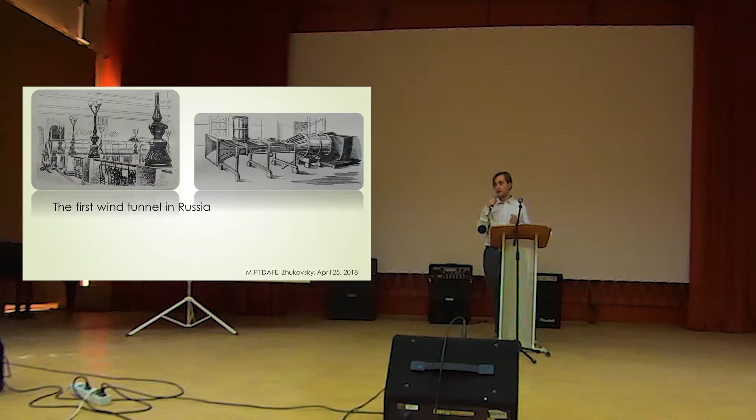With the help of his students, he managed to build the first wind tunnel in Russia. Due to lack of space, the 7 meters long tunnel was placed right in the lobby of the university. With help of volunteers and his students, he explored how man-made objects like kites or stuffed birds behave in the tunnel, and this became a basis for the theory of spinning.

Zhukovsky was also the first scientist to mathematically explain the origins of lifting power. According to Zhukovsky, the lifting power equals the density of liquid multiplied by the speed of the flow on incidence and velocity circulation and length of the current segment of the wing.

In addition to his scientific works, you can see on the screen his famous transform. He transforms the complex space circle into an airfoil, and here's the formula that does this. So this is all about his scientific works.

Now I'd like to pass the word to my colleague Natalia to tell you about his memories and influence. Thank you, Georgi. And now let's turn to the third part of our presentation.

To begin with, in 1904, on the basis of his laboratory, the first Institute of Aerodynamic Research was created. It was there that Zhukovsky made his main discovery. He found the force of the lift of the wing and gave a formula for calculating this force. Thus, the calculation of any aircraft became possible.

Importantly, even before the war, Zhukovsky organized aviation courses. There he began, first in the world, to read the course of lectures on theoretical foundations of aeronautics. In 1918, the courses were transformed into the Moscow Institute of Air Fleet Engineers, and later it was renamed the Zhukovsky Air Fleet Academy.

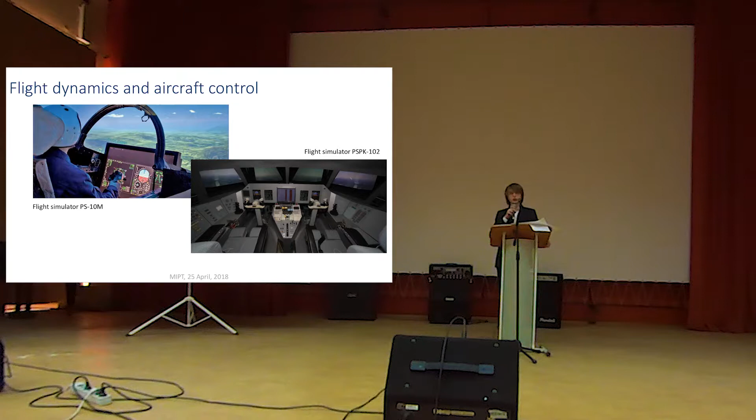So let's start with flight dynamics and aircraft control. Aircraft control have always been an area of high priority for TSAGI. The institute has introduced lots of flight simulators and control systems simulators for solving complex tasks involving dynamics of maneuverable and passenger aircraft. TSAGI specialists use simulators for experiments with takeoff and landing modes of passenger and experimental aircraft, and also to study dynamics and controllability of unmanned aerial vehicles.

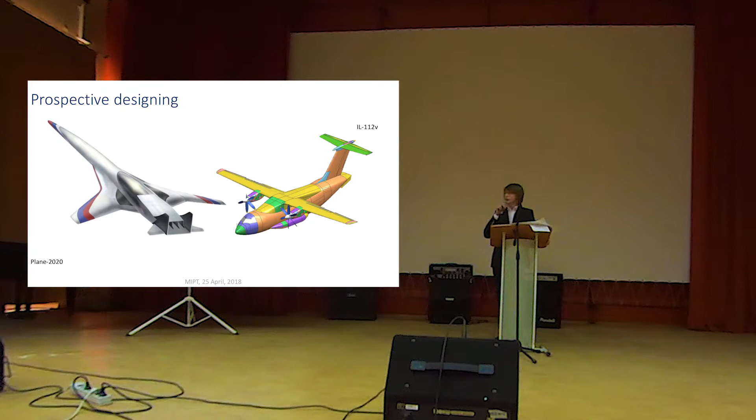Prospective designing research into the prospects of aerospace development rests on an efficient design technology which draws upon the Institute's increasing scientific and technological solutions. The results of the optimization are used in substantiating the feasibility of new concepts and preparing wind tunnel and test bench experiments.

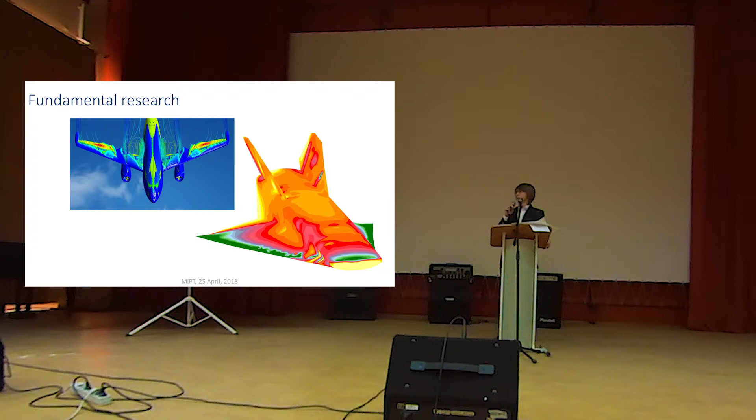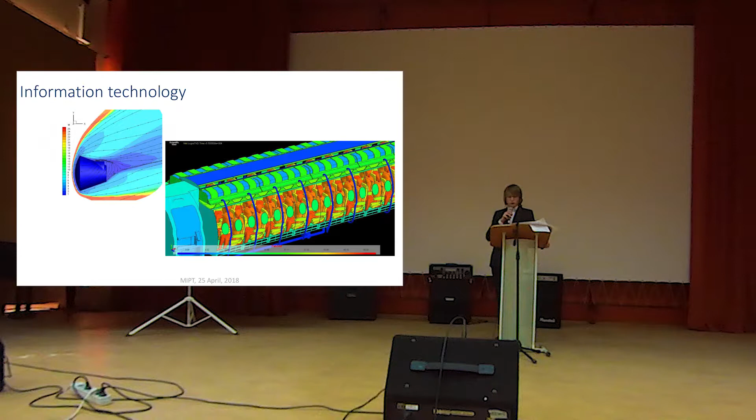One of the most important areas of the information technology supplies at TSAGI is the procurement of fundamental and applied computational and experimental research in aerodynamics, aeroelasticity, strength, and flight control systems for aircraft of various types. Well-known computational systems are widely used in studies.

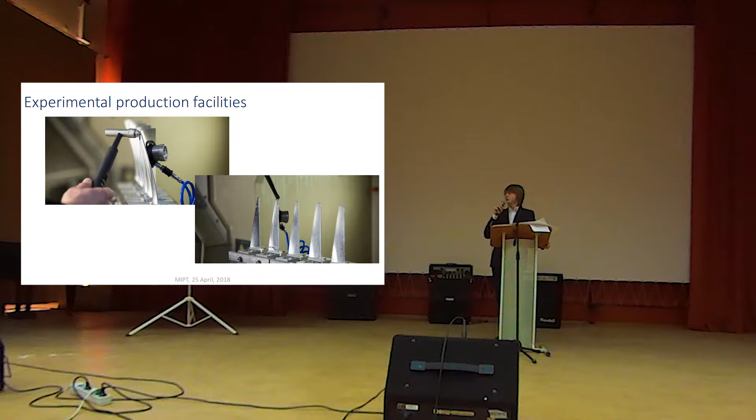It's necessary to mention that developing and manufacturing aerodynamic scale models is an important line of the Institute's activity. Models range from several centimeters to large-scale models that have 10 meters in dimensions and more. A number of innovative facilities conforming to world standards has been created at TSAGI to satisfy the increasing demands of modern experiments, and you can see some of them on the slide. That's all for my part, and I'll pass the word to my colleague Yaroslav.

Thank you, Natalia. It was really interesting. Now I'm going to tell you about projects that have been developed by TSAGI. It's a well-known fact that TSAGI is involved in many spheres of aircraft construction, such as aerodynamics, strength tests, and aeroacoustics, and many others. Aerodynamics is one of the most important spheres that TSAGI started developing. Each aircraft constructed in Russia is tested in wind tunnels at TSAGI.

Along with aircraft research, TSAGI tests other things. For example, they research airflows made by trains. On this slide you can see wind tunnel T-101, one of the first wind tunnels made at TSAGI, and also supersonic wind tunnel T-117.

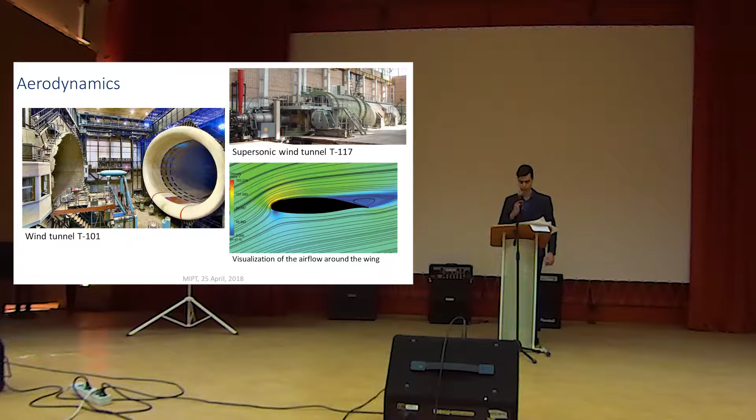Moreover, TSAGI is engaged in other important things, such as strength tests. Without investigating different materials' durability and fastening, it's unreal to build and create an airplane. So TSAGI engineers carry out research in aeroelasticity both in laboratories and in practice. For the last few years, a lot of well-known projects have been made at TSAGI, such as experimental testing of strength and aeroelasticity of the most modern aircraft built in Russia, such as the Su-35, Su-57, and Sukhoi Superjet 100.

It's necessary to mention that using new and powerful engines has turned aircraft noise into one of the most negative factors influencing the environment. That's why specialists from TSAGI are working on noise reduction. Lately, TSAGI has carried out many researches connected with engine noise reduction. For example, specialists of TSAGI took part in different projects connected with civil aviation, such as the Tu-134, Tu-154, and Il-86, and many others.

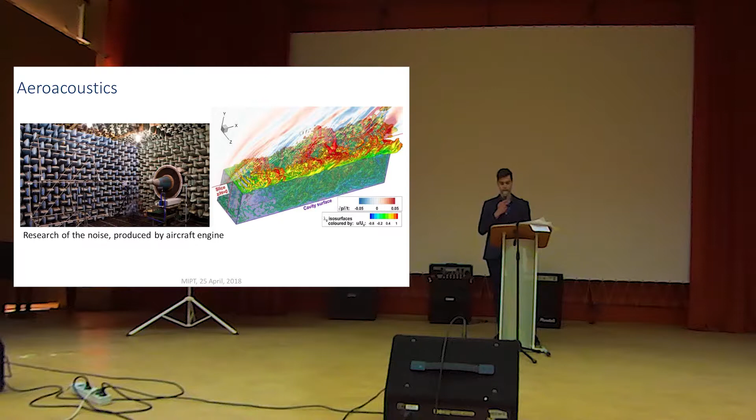Moreover, a big job was done by the aerodynamics and aeroacoustic departments. Mass production of MS-21 will start in 2019, and we hope it will be able to compete with airplanes like the Boeing 737 MAX or Airbus 320neo. Besides, TSAGI is working on many other projects now. For example, the new Russian fifth generation fighter Su-57 is being tested by many TSAGI departments.

Next slide, please. Also, today TSAGI successfully cooperates with more than 50 foreign companies, such as Boeing, Airbus, Embraer, NASA, and so on. For the last 15 years, TSAGI has completed more than 450 contracts with foreign companies and research centers.

That's all I wanted to say about TSAGI's projects. To sum up, TSAGI is one of the most influential and biggest research centers in the aviation area. This year TSAGI celebrates its 100th anniversary, and that's why we chose this topic for our presentation. Thank you for your attention. Now I'm able to answer your questions.

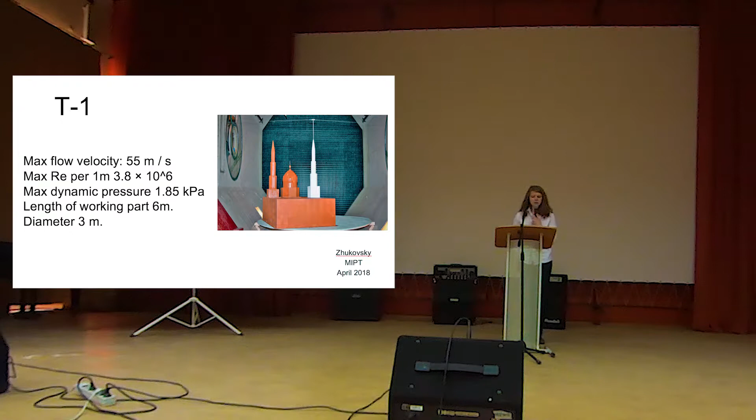Now I want to tell you about T1. You can see its characteristics on the slide. It is used for determination of stationary or non-stationary aerodynamic characteristics of aircraft and ships, and to study wind oscillations of industrial structures and methods of their damping.

So another wind tunnel, T5 of Moscow TsAGI, information about it you can see on the slide. The capabilities of this wind tunnel are used for research and development of various airplanes in takeoff and landing modes, as well as industrial facilities like offshore oil and gas platforms.

So that's all about industrial acoustics, and now I want to give the word to Arina. Thank you, Varvara, your part was wonderful.

Now let's move on to the experimental base of the Moscow complex of Tsagi Center. It includes the experimental basin shown on the slide, and you can learn its characteristics if interested. It represents a channel tray whose length reaches 202 meters. However, the most important information is about the possibilities its functionality offers to the scientific and industrial world, and the experiments that can be carried out.

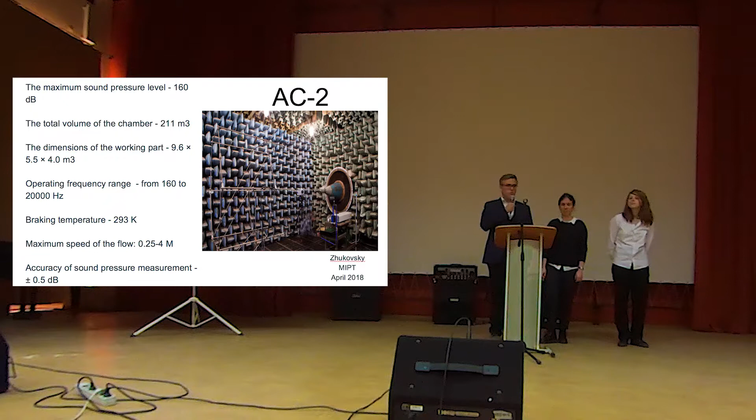Today we are going to tell you about Russian Helicopters, which is a leading player in the global helicopter industry, the sole Russian rotorcraft designer and manufacturer, and one of a few companies worldwide with the capability to design, manufacture, test, and service modern civilian and military helicopters. Holding company Russian Helicopters is part of state corporation Rostec and one of the most important parts of the Russian military industrial complex. Actually, six months ago we went on an excursion to the Russian Helicopters headquarters in Tomilino, and that was one of the reasons why we decided to tell you about this holding company today.

Our presentation is divided into four main parts. Firstly, we'll tell you about the structure of the holding company. After that, some facts from the biography of well-known helicopter designers will be given to you. Then you will hear about the most interesting and fascinating helicopters designed by the MIL and Kamov Design Bureaus. After that, some information about current projects of Russian Helicopters will be given. At the end, a short conclusion will be given and you will be able to ask your questions.

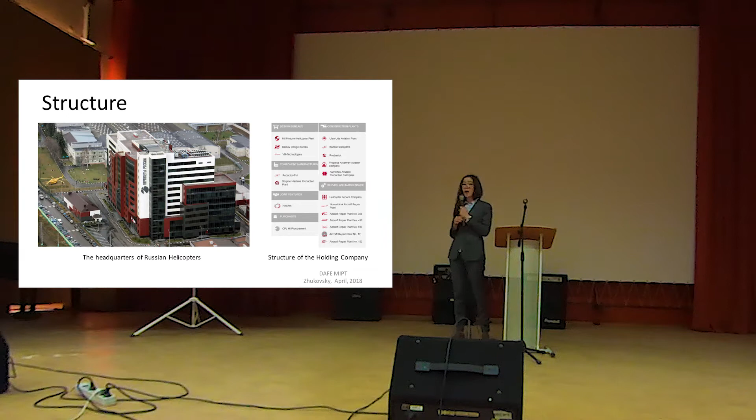Now let's speak about them. Probably all of you know these names: Mikhail Leontievich Mil and Nikolai Ilyich Kamov. To begin with, I will tell you about Nikolai Kamov, as he was Mil's teacher and supported him a lot. Here is a picture of him. Nikolai Kamov was born in 1902. During his education, he showed interest in exact sciences and aviation. Later, he even tried to join a squadron, but due to an injury of his arm, he wasn't accepted.

In 1923, after graduating with honors from university, Kamov went to Moscow and started work at the Junkers plant. In the 1920s, he began working on airplanes and autogyros. In 1931, he was appointed director of the TsAGI construction brigade. Later, in 1940, he became chief designer of a design bureau for helicopters. Nikolai Kamov died in 1973.

Now let's talk about Mikhail Leontievich Mil. Mikhail Mil was born in 1909 - an interesting fact is that in that same year, another well-known Russian aircraft designer, Igor Sikorsky, made his first helicopter. In 1925, Mikhail Mil went to the Siberian Technical Institute. During his education, he built his first glider and made his first flight. Unfortunately, while studying in his second year, he was expelled from the institute. After that, he managed to enroll in the Don Polytechnic Institute.